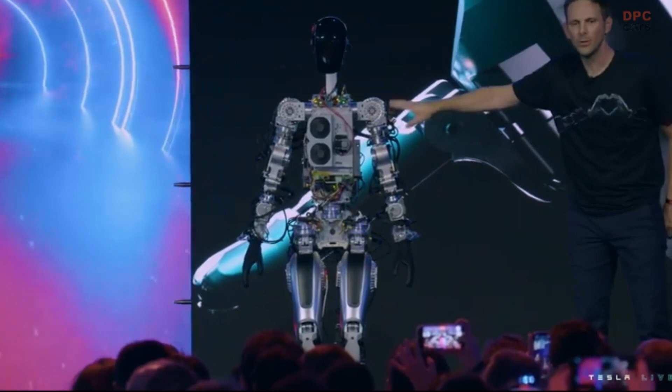I think the bot got some moves too. So this is essentially the same full self-driving computer that runs in your Tesla cars, by the way. This is literally the first time the robot has operated without a tether. It was on stage tonight.

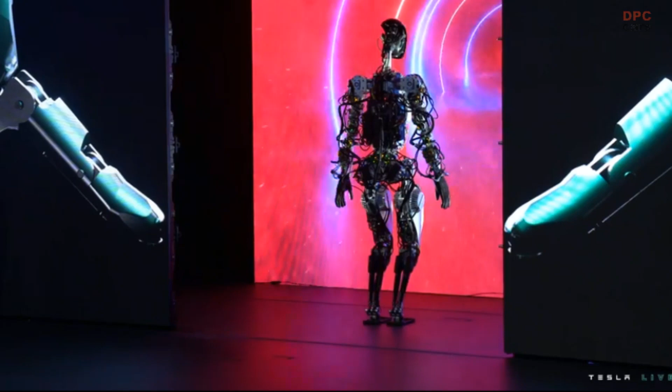So the robot can actually do a lot more than we just showed you. We just didn't want it to fall on its face. So we'll show you some videos now of the robot doing a bunch of other things, which are less risky. We should close the screen, guys.

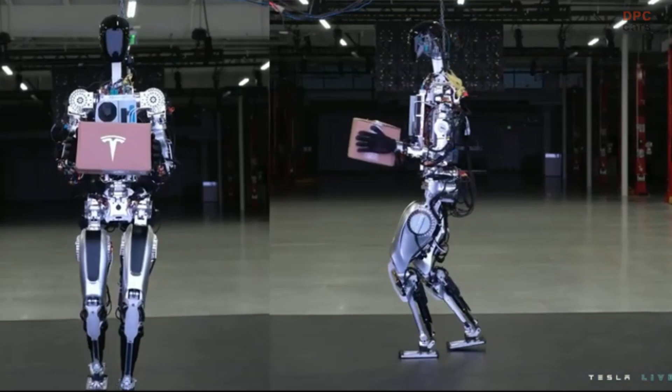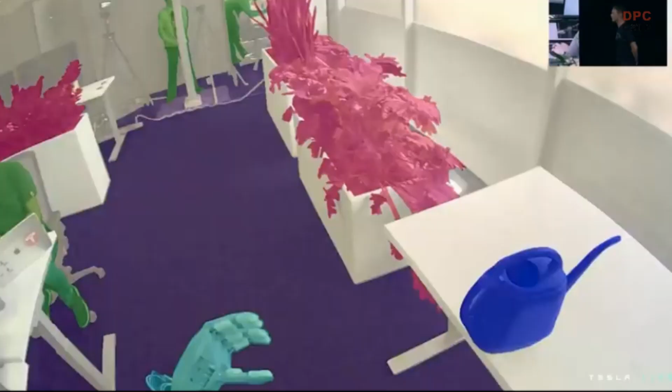Yeah, we wanted to show a little bit more what we've done over the past few months with the bot, beyond just walking around and dancing on stage. Just humble beginnings, but you can see the Autopilot neural networks running as is, just retrained for the bot directly on that new platform. That's my watering can. When you see a rendered view, that's the world the robot sees. So it's very clearly identifying objects, like this is the object it should be picking up.

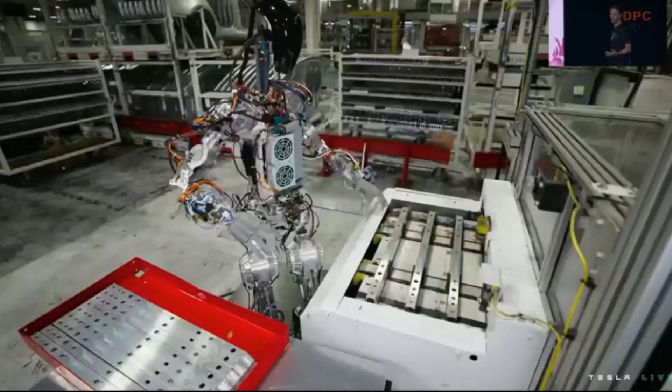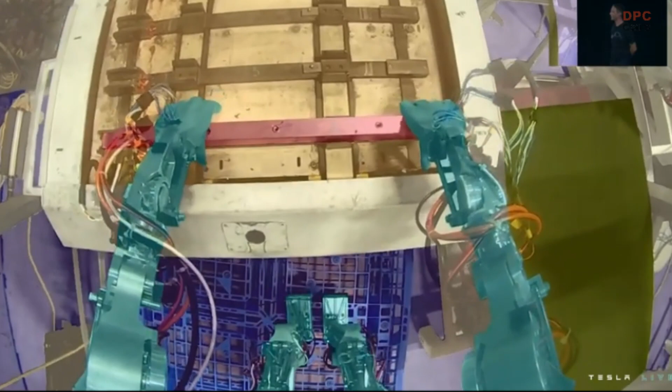We use the same process as we did for Autopilot to collect data and train neural networks that we then deploy on the robot. That's an example that illustrates the upper body a little bit more. Something that we'll try to nail down over the next few months, I would say, to perfection. This is really an actual station in the Fremont factory that it's working at.

And that's not the only thing we have to show today, right? Yeah, absolutely. So what you saw was what we call Bumble C. That's our sort of rough development robot using semi-off-the-shelf actuators. But we actually have gone a step further than that already. The team's done an incredible job. And we actually have an Optimus bot with fully Tesla-designed and built actuators, battery pack, control system, everything. It wasn't quite ready to walk, but I think it will walk in a few weeks.

But we wanted to show you the robot, something that's actually fairly close to what will go into production, and show you all the things it can do. So let's bring it out. Do it.

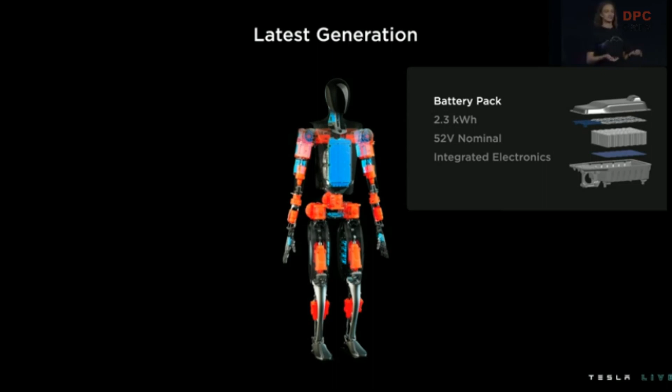So going on to sort of our brain, it's not in the head, but it's pretty close. Also in our torso, we have our central computer. As you know, Tesla already ships full self-driving computers in every vehicle we produce. We want to leverage both the autopilot hardware and the software for the humanoid platform, but because it's different in requirements and in form factor, we're going to change a few things first.

It's going to do everything that a human brain does, processing vision data, making split-second decisions based on multiple sensory inputs, and also communications. To support communications, it's equipped with wireless connectivity as well as audio support. And then it also has hardware-level security features, which are important to protect both the robot and the people around the robot.

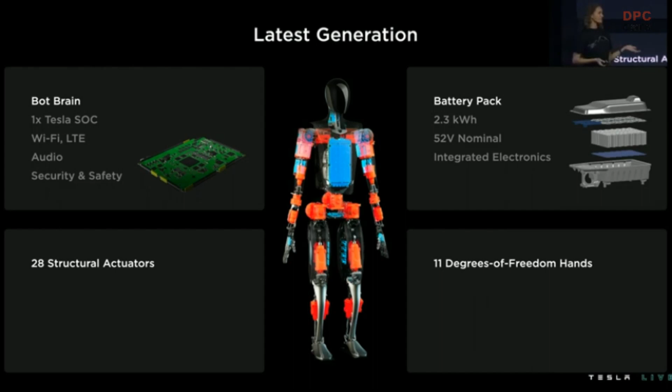So now that we have our sort of core, we're going to need some limbs on this guy. And we'd love to show you a little bit about our actuators and our fully functional hands as well. But before we do that, I'd like to introduce Malcolm, who's going to speak a little bit about our structural foundation for the robot. Thank you, Lizzie.

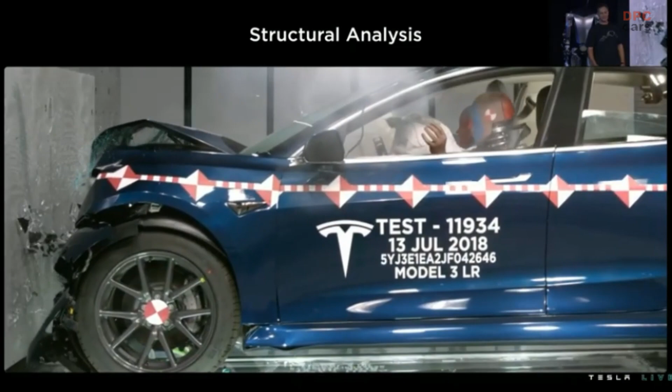Tesla have the capabilities to analyze highly complex systems. They don't get much more complex than a crash. You can see here a simulated crash from Model 3 superimposed on top of the actual physical crash. It's actually incredible how accurate it is. Just to give you an idea of the complexity of this model, it includes every nut, bolt, and washer, every spot weld, and it has 35 million degrees of freedom. It's quite amazing. And it's true to say that if we didn't have models like this, we wouldn't be able to make the safest cars in the world.

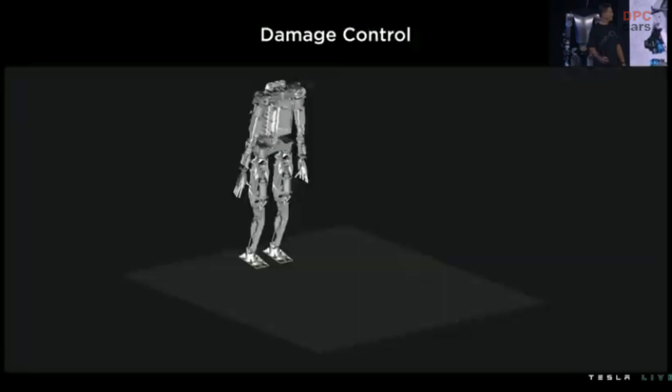So can we utilize our capabilities and our methods from the automotive side to influence a robot? Well, we can make a model, and since we had crash software, we're using the same software here, we can make it fall down. The purpose of this is to make sure that if it falls down, ideally it doesn't, but it's superficial damage. We don't want it to, for example, break its gearbox in its arms. That's the equivalent of a dislocated shoulder for a robot. Difficult and expensive to fix. So we want it to dust itself off, get on with the job it's been given.

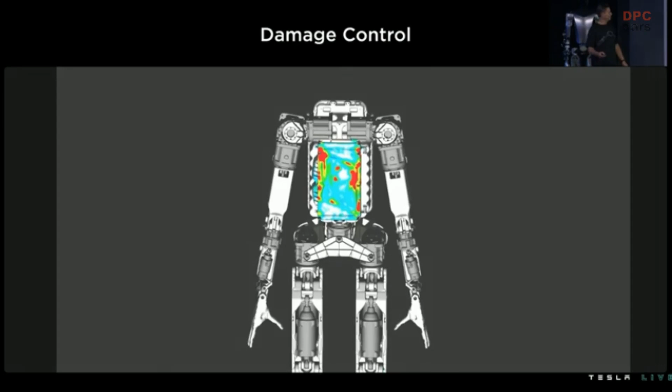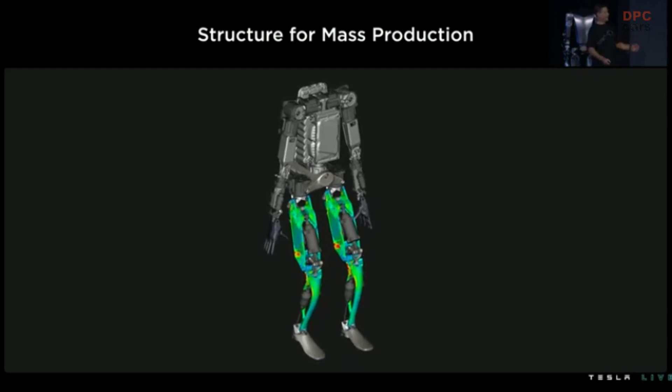We can also take the same model and we can drive the actuators using the inputs from a previously solved model, bringing it to life. So this is producing the motions for the tasks we want the robot to do. These tasks are picking up boxes, turning, squatting, walking upstairs. Whatever the set of tasks are, we can play to the model. This is showing just simple walking. We can create the stresses in all the components. That helps us to optimize the components.

These are not dancing robots. These are actually the modal behavior, the first 5 modes of the robot. Typically, when people make robots, they make sure the first mode is up around the top single figures, up towards 10 hertz. The reason to do this is to make the controls of walking easier. It's very difficult to walk if you can't guarantee where your foot is, wobbling around. That's okay if you make one robot. We want to make thousands, maybe millions.

We haven't got the luxury of making them from carbon fiber and titanium. We want to make them from plastic. Things are not quite so stiff. So we can't have these high targets. I call them dumb targets. We've got to make them work at lower targets. So is that going to work?

Well, if you think about it, sorry about this, but we're just bags of soggy jelly and bones thrown in. We're not high frequency. If I stand on my leg, I don't vibrate at 10 hertz. People operate at low frequency, so we know the robot actually can. It just makes controls harder. So we take the information from this, the modal data and the stiffness, and feed that into the control system. That allows it to walk.

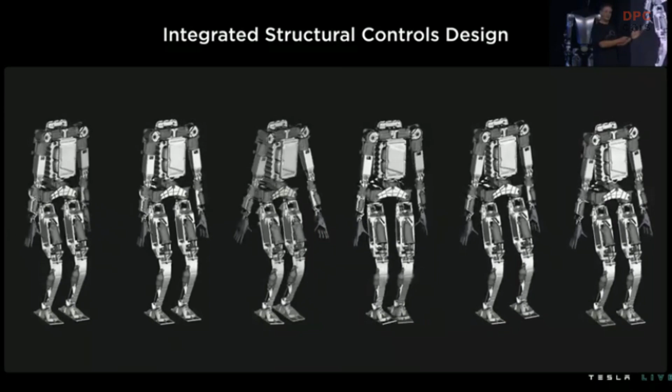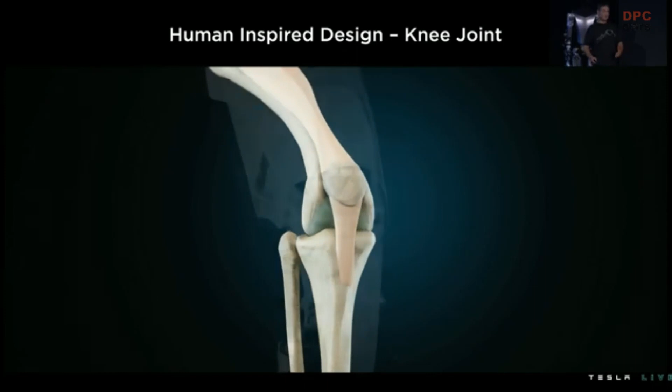Just changing tack slightly, looking at the knee. We can take some inspiration from biology, and we can look to see what the mechanical advantage of the knee is. It turns out it actually represents quite similar to a 4-bar link, and that's quite non-linear. That's not surprising, really, because if you think when you bend your leg down, the torque on your knee is much more when it's bent than it is when it's straight. So you'd expect a non-linear function. And in fact, the biology is non-linear. This matches it quite accurately.

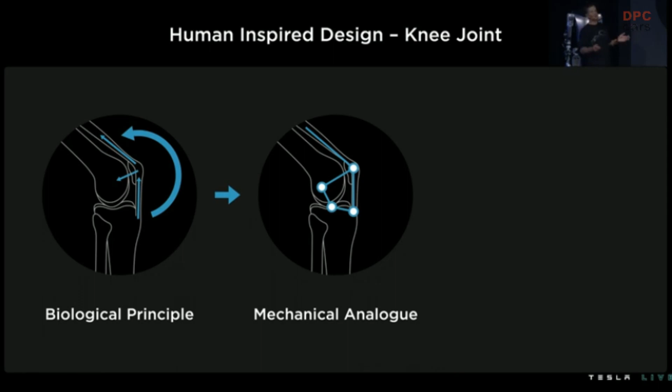So that's a representation. The 4-bar link is obviously not physically a 4-bar link. As I said, the characteristics are similar. But me bending down, that's not very scientific. Let's be a bit more scientific. We've played all the tasks through this graph.

So if we look at the 4-bar link, that's actually the green curve, and it's saying that the non-linearity of the 4-bar link has actually linearized the characteristic of the force. What that really says is that's lowered the force. That's what makes the actuator have the lowest possible force, which is the most efficient. We want to burn energy up slowly.

What's the blue curve? Well, the blue curve is actually if we didn't have a 4-bar link, we just had an arm sticking out of my leg here with an actuator on it, a simple 2-bar link. That's the best we could do with a simple 2-bar link. And it shows that that would create much more force in the actuator, which would not be efficient.

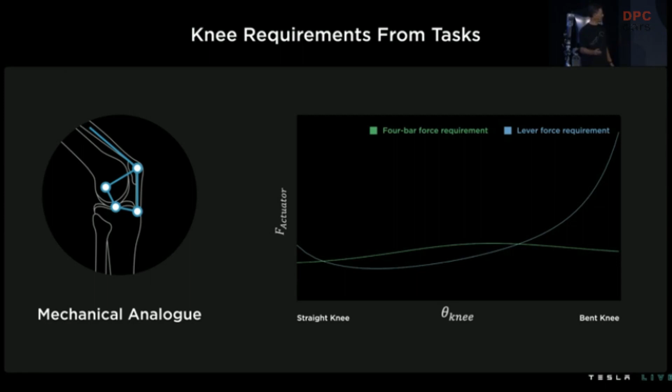So what's that look like in practice? Well, as you'll see, it's very tightly packaged in the knee. You'll see it go transparent in a second. You'll see the 4-bar link there. It's operating on the actuator. This is determining the force and the displacements on the actuator.

I'll now pass you over to Konstantinos, who'll tell you a lot more detail about how these actuators are made and designed and optimized. Thank you. Thank you, Malcolm. So I would like to talk to you about the design process and the actuator portfolio in our robot.

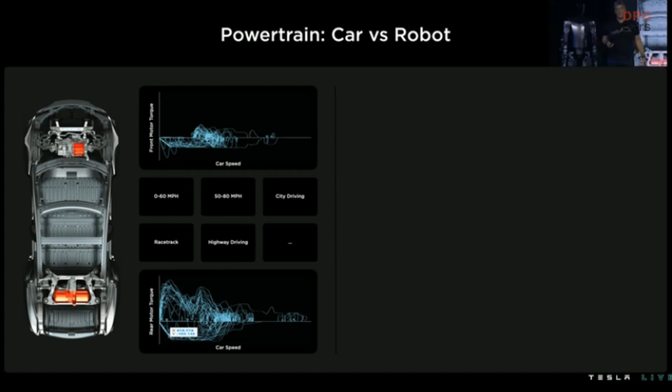So there are many similarities between a car and a robot when it comes to powertrain design. The most important thing that matters here is energy, mass, and cost. We are carrying over most of our designing experience from the car to the robot. So in the particular case, you see a car with 2 drive units. And the drive units are used in order to accelerate the car 0 to 60 miles per hour time or drive a city drive cycle.

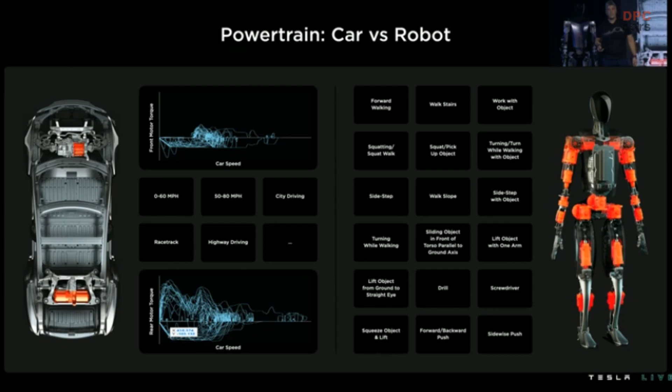While the robot that has 28 actuators, it's not obvious what are the tasks at actuator level. So we have tasks that are higher level, like walking or climbing stairs or carrying a heavy object, which need to be translated into joint specs. Therefore, we use our model that generates the torque speed trajectories for our joints, which subsequently is going to be fed in our optimization model to run through the optimization process.

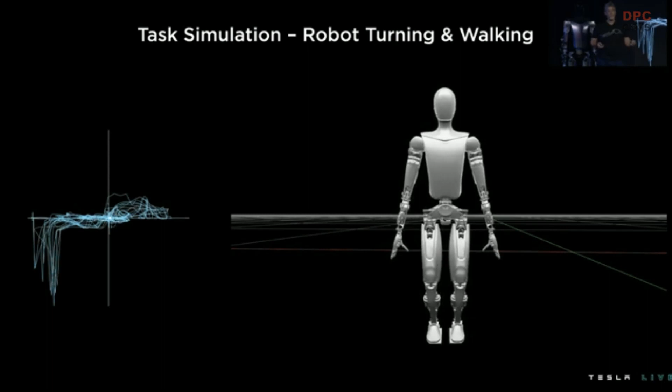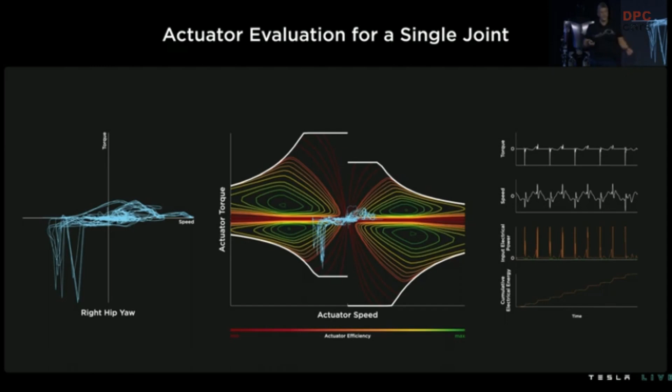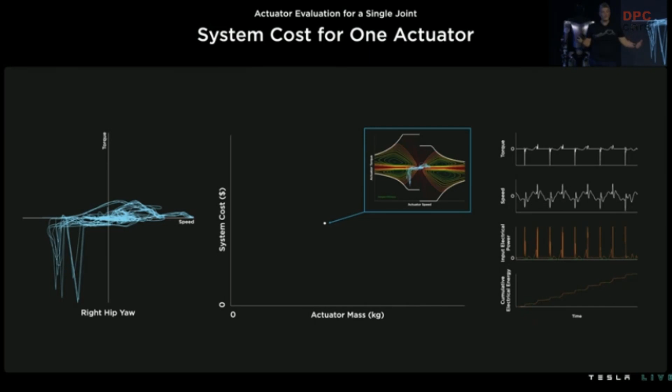This is one of the scenarios that the robot is capable of doing, which is turning and walking. So when we have this torque speed trajectory, we lay it over an efficiency map of an actuator, and we are able, along the trajectory, to generate the power consumption and the cumulative energy for the task versus time. So this allows us to define the system cost for the particular actuator and put a simple point into the cloud. Then we do this for hundreds of thousands of actuators by solving in our cluster.

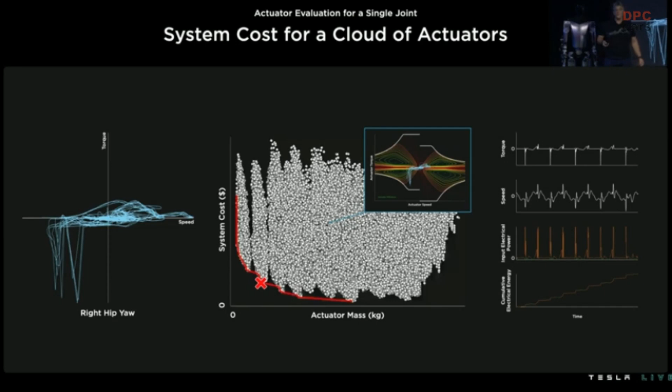And the red line denotes the Pareto front, which is the preferred area where we will look for our optimal. So the X denotes the preferred actuator design we have picked for this particular joint. So now we need to do this for every joint. We have 28 joints to optimize, and we parse our cloud again for every joint spec, and the red X's this time denotes the bespoke actuator designs for every joint. The problem here is that we have too many unique actuator designs, and even if we take advantage of the symmetry, still there are too many.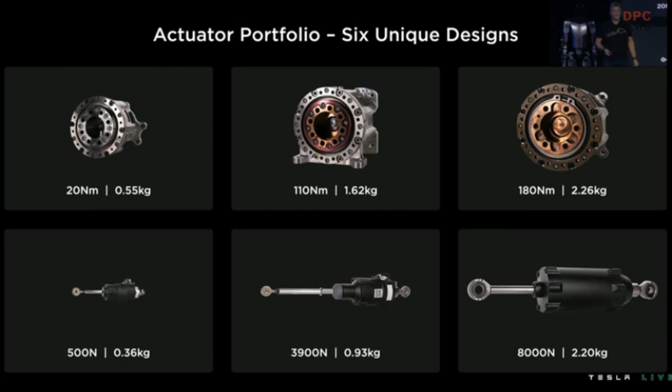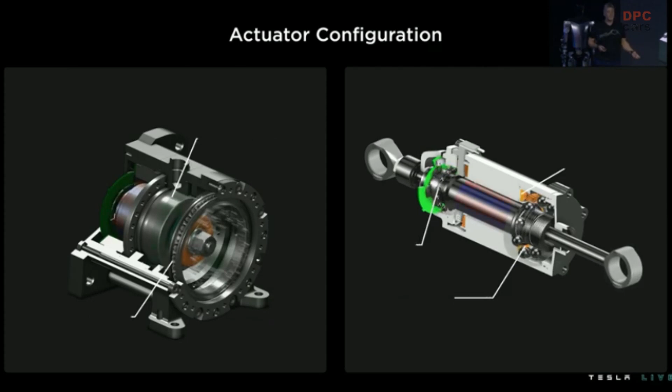The rotary actuator in particular has a mechanical clutch integrated; on the high-speed side, an angular contact ball bearing, and on the low-speed side, a cross-roller bearing, and the gear train is a strain wave gear. There are 3 integrated sensors here and a bespoke permanent magnet machine.

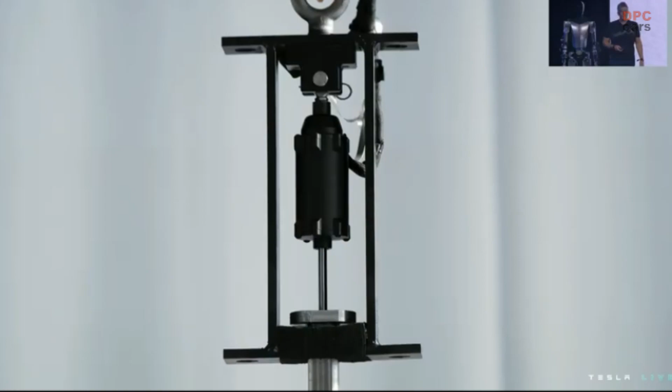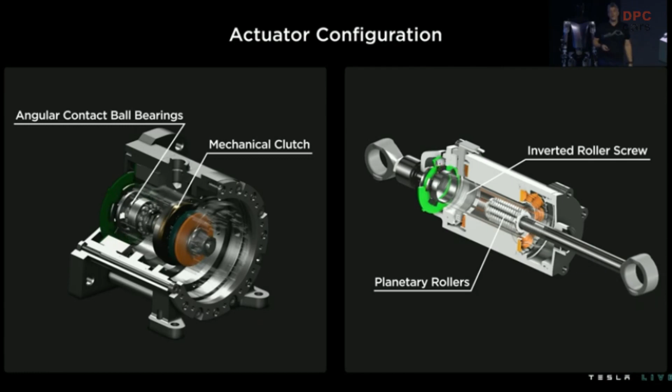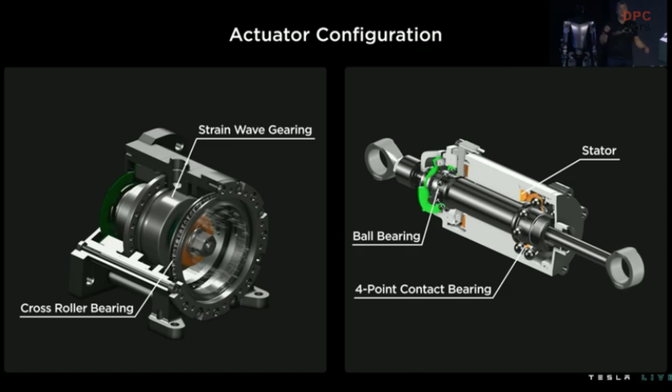The linear actuator has planetary rollers and an inverted roller screw as a gear train, which allows efficiency, compaction, and durability. So in order to demonstrate the force capability of our linear actuators, we have set up an experiment in order to test it under its limits. And I will let you enjoy the video.

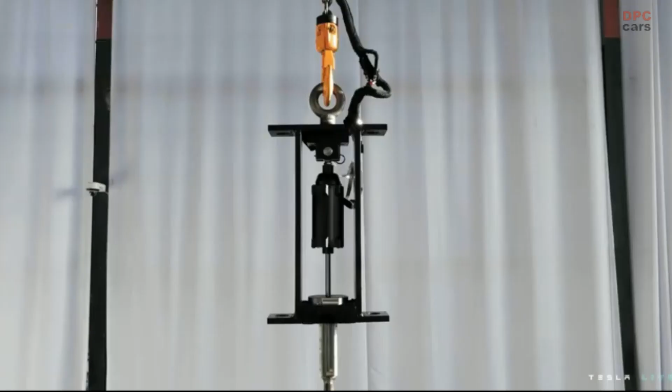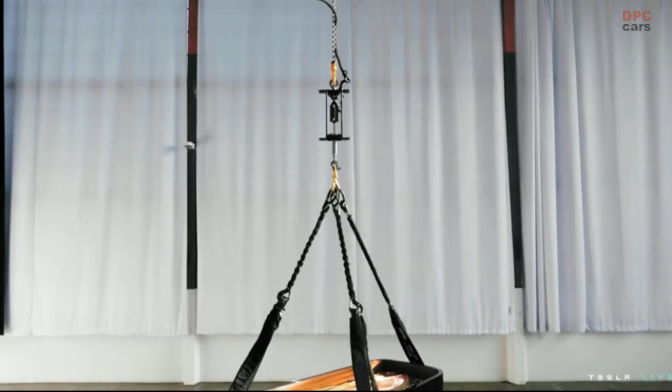So our actuator is able to lift a half-ton, 9-foot concert grand piano. And this is a requirement. It's not something nice to have, because our muscles can do the same when they are directly driven. Our quadricep muscles can do the same thing. It's just that the knee is an up-gearing linkage system that converts the force into velocity at the end effector of our heels, for purposes of giving the human body agility. So this is one of the main things that are amazing about the human body.

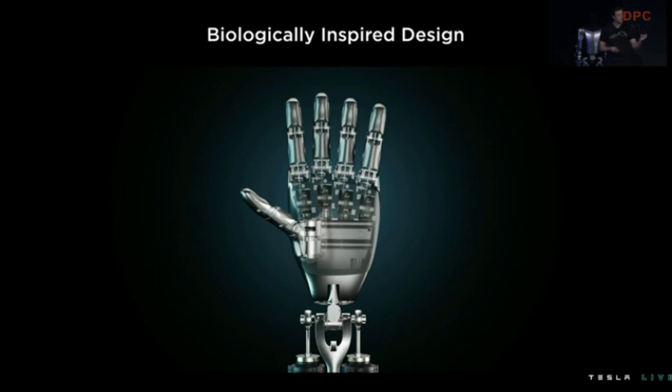We have 5 fingers and an opposable thumb. Our fingers are driven by metallic tendons that are both flexible and strong. We have the ability to complete wide aperture power grasps while also being optimized for precision gripping of small, thin, and delicate objects. So why a human-like robotic hand?

Well, the main reason is that our factories and the world around us is designed to be ergonomic. So what that means is that it ensures that objects in our factory are graspable, but it also ensures that new objects that we may have never seen before can be grasped by the human hand and by our robotic hand as well. The converse there is pretty interesting because it's saying that these objects are designed to our hand instead of having to make changes to our hand to accommodate a new object.

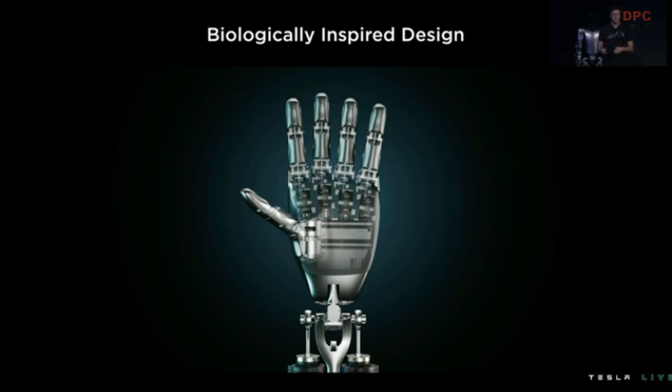Some basic stats about our hand is that it has 6 actuators and 11 degrees of freedom. It has an in-hand controller, which drives the fingers and receives sensor feedback. Sensor feedback is really important to learn a little bit more about the objects that we're grasping, and also for proprioception. And that's the ability for us to recognize where our hand is in space.

One of the important aspects of our hand is that it's adaptive. This adaptability is involved essentially as complex mechanisms that allow the hand to adapt to the objects that are being grasped. Another important part is that we have a non-backdrivable finger drive. This clutching mechanism allows us to hold and transport objects without having to turn on the hand motors. You just heard how we went about designing the Tesla Bot hardware.

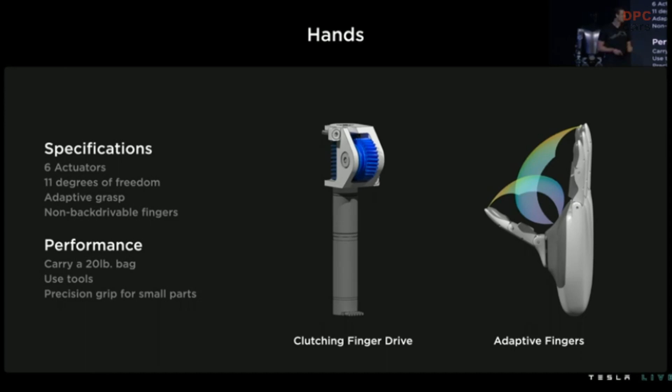All right. So all those cool things we've shown earlier in the video were possible just in a matter of a few months, thanks to the amazing work that we've done on Autopilot over the past few years. Most of those components ported quite easily over to the bot's environment. If you think about it, we're just moving from a robot on wheels to a robot on legs. So some of the components are pretty similar, and some others require more heavy lifting.

So for example, our computer vision neural networks were ported directly from Autopilot to the bot's situation. It's exactly the same occupancy network that we'll talk about in a little bit more detail later with the Autopilot team that is now running on the bot here in this video. The only thing that changed really is the training data that we had to recollect.

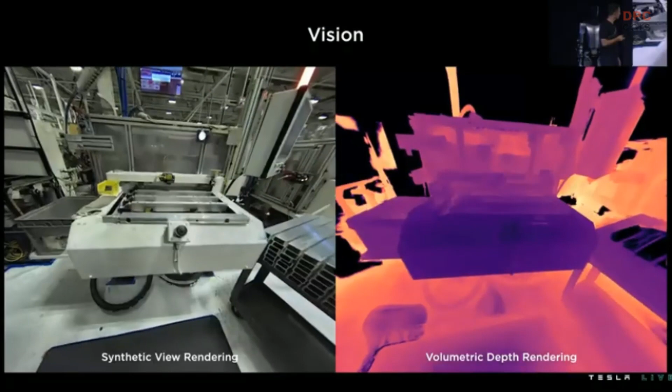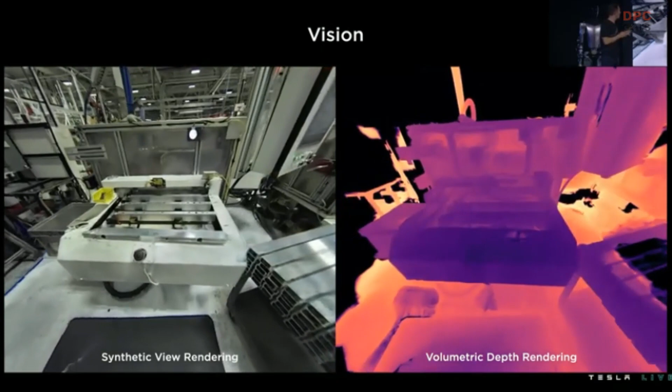We're also trying to find ways to improve those occupancy networks using work made on neural radiance fields to get really great volumetric rendering of the bot's environments. For example, here, some machinery that the bot might have to interact with.

Another interesting problem to think about is, in indoor environments, mostly with that absence of GPS signal, how do you get the bot to navigate to its destination? Say, for instance, to find its nearest charging station.

So we've been training more neural networks to identify high-frequency features, key points within the bot's camera streams, and track them across frames over time as the bot navigates through its environment. And we're using those points to get a better estimate of the bot's pose and trajectory within its environment as it's walking.

We also did quite some work on the simulation side, and this is literally the Autopilot simulator, to which we've integrated the robot's locomotion code. And this is a video of the motion control code running in the Autopilot simulator, showing the evolution of the robot's walk over time. And so as you can see, we started quite slowly in April and started accelerating as we unlock more joints and deploy more advanced techniques like arms balancing over the past few months.

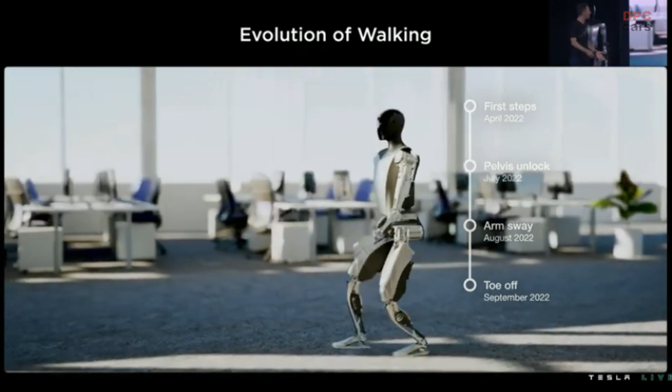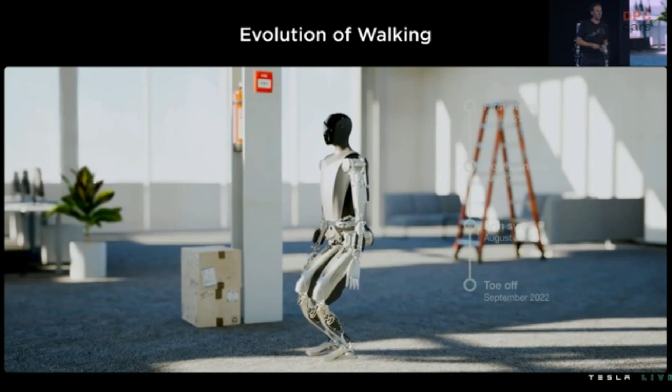And so locomotion is specifically one component that's very different as we're moving from the car to the bot's environment. And so I think it warrants a little bit more depth, and I'd like my colleagues to start talking about this now.

Thank you, Milan. Hi, everyone. I'm Felix. I'm a robotics engineer on the project, and I'm going to talk about walking. Walking seems easy, right? People do it every day. We don't even have to think about it. But there are some aspects of walking which are challenging from an engineering perspective.

For example, physical self-awareness. That means having a good representation of yourself. What is the length of your limbs? What is the mass of your limbs? What is the size of your feet? All that matters. Also, having an energy-efficient gait. You can imagine there's different styles of walking, and not all of them are equally efficient.

Most important, keep balance, don't fall. And of course, also coordinate the motion of all of your limbs together. So now, humans do all of this naturally, but as engineers or roboticists, we have to think about these problems. And in the following, I'm going to show you how we address them in our locomotion planning and control stack.

So we start with locomotion planning and our representation of the bot. That means a model of the robot's kinematics, dynamics, and the contact properties. And using that model and the desired path for the bot, our locomotion planner generates reference trajectories for the entire system. This means feasible trajectories with respect to the assumptions of our model.

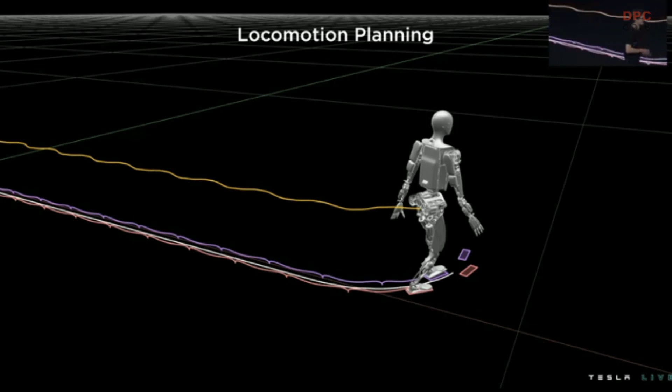Thank you, Felix. Hello, everyone. My name is Anand, and I'm going to talk to you about controls.

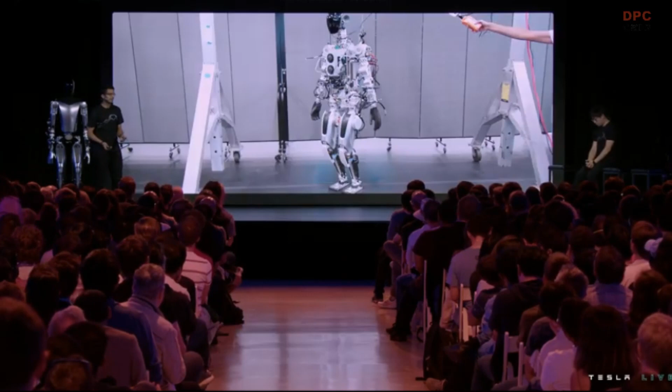So let's take the motion plan that Felix just talked about and put it in the real world on a real robot. Let's see what happens. It takes a couple steps and falls down. Well, that's a little disappointing. But we are missing a few key pieces here, which will make it walk.

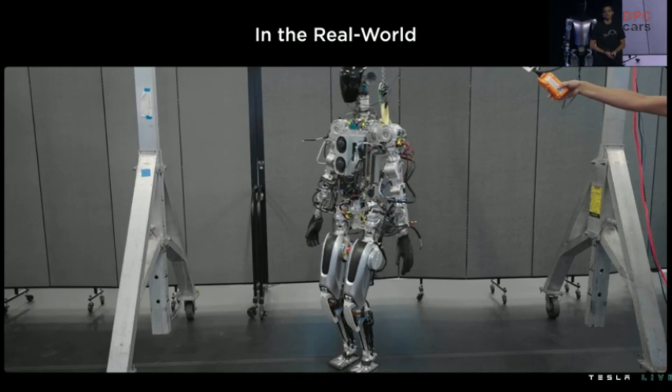Now, as Felix mentioned, the motion planner is using an idealized version of itself and a version of reality around it. This is not exactly correct. It also expresses its intention through trajectories and wrenches. Wrenches are forces and torques that it wants to exert on the world to locomote.

Reality is way more complex than any sim or model. Also, the robot is not simplified. It's got vibrations and modes, compliance, sensor noise, and on and on and on. So what does that do when you put the bot in the real world? Well, the unexpected forces cause unmodeled dynamics, which essentially the planner doesn't know about, and that causes destabilization, especially for a system that is dynamically stable like biped locomotion.

Now we have all the pieces we need in order to close the loop. So we use our better bot model, we use the understanding of reality that we've gained through state estimation, and we compare what we want versus what we expect that reality is doing to us in order to add corrections to the behavior of the robot. Here, the robot certainly doesn't appreciate being poked, but it does an admirable job of staying upright.